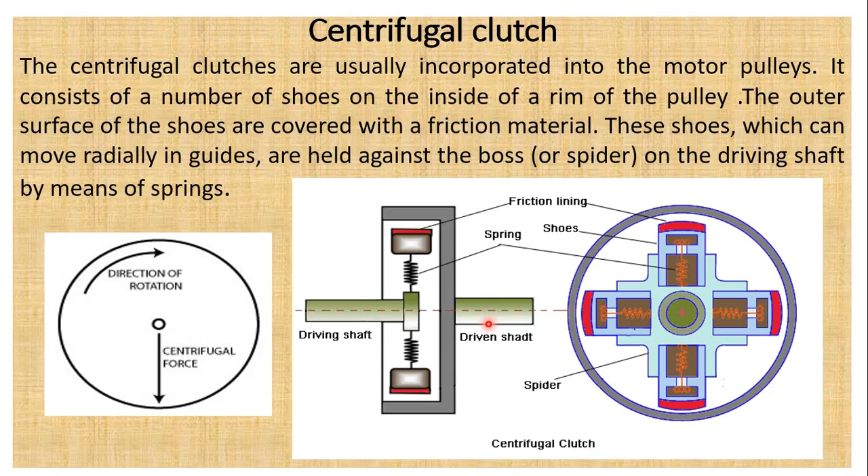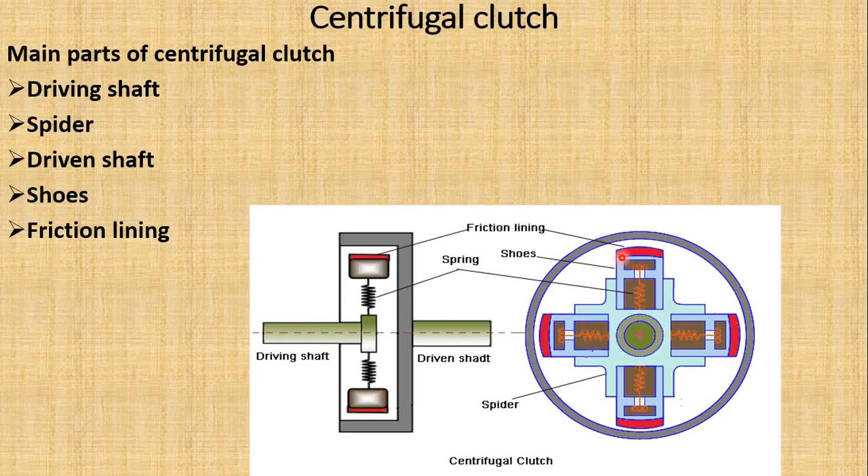Now you can see here there is a driving shaft and a driven shaft. Some important parts of the centrifugal clutch: this is called the driven shaft, and this is the driving shaft. This is a spider, or you can say spider or bush. This is the driven shaft, and these are the shoes. You can see the shoes and the friction lining, which is red in color. There is friction lining here numbered 1, 2, 3 and 4.

Its working totally depends upon the centrifugal force created by the driving members of the engine or motor. As I already told you, the centrifugal force is used to engage the clutch with the driven shaft. As the engine starts rotating, it produces a centrifugal force which makes the sliding shoes move outward.

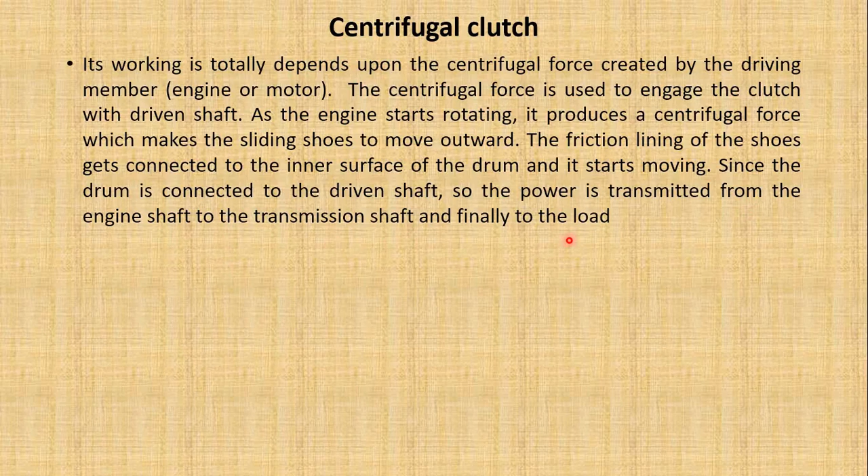The friction lining of the shoes gets connected to the inner surface of the drum, and it starts moving. Since the drum is connected to the driven shaft, the power is transmitted from the engine shaft to the transmission shaft, and finally the load is also transmitted from the engine to the other transmission shaft. We can easily understand this with the help of this diagram.

But what happens when the speed increases due to the centrifugal force? The shoe will connect with the pulley, and the whole assembly starts rotating together. As the engine starts rotating, the assembly of the centrifugal clutch also starts rotating, but the drum remains stationary and no power is transmitted at lower speed, because the centrifugal force produced is not sufficient to overcome the spring force, so the clutch remains in the disengaged condition.

Then what happens when the speed is increased? The centrifugal force also increases, and it becomes greater than the spring force, which is very important. When the speed increases and the centrifugal force is greater than the spring force, this allows the sliding shoes to move outward against the spring and get engaged. In this condition, since the centrifugal force is greater than the spring force, it allows the shoes to make contact with the pulley.

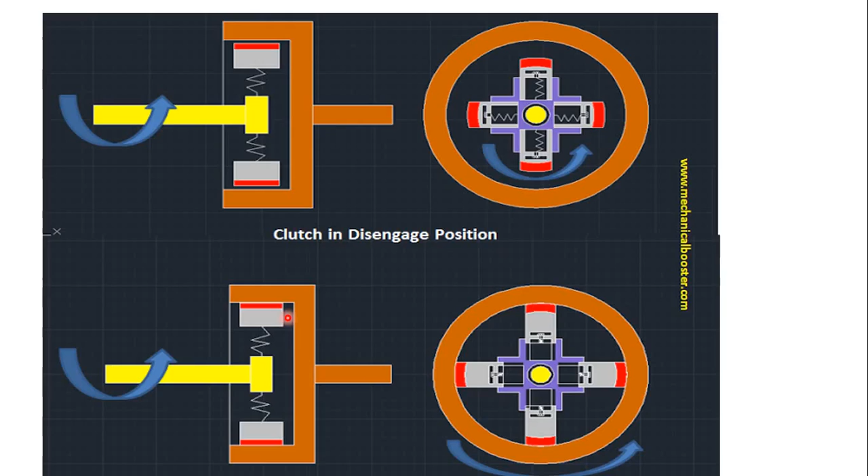This is when the centrifugal force exceeds the spring force, the shoe moves outward and comes in contact with the driven member. This pulley is connected with the driven member. When it gets attached to the driven member and presses against it, a high amount of friction is generated at this contact point.

The force with which the shoe presses against the driven member is the difference of centrifugal force and spring force. Whatever amount of force causes the shoe to get compressed against the pulley, that will be the difference between the centrifugal force and spring force.

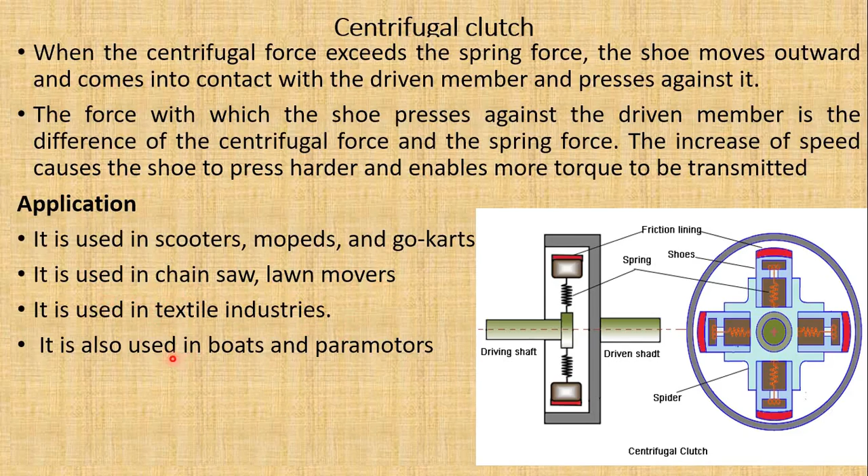The increase of speed causes the shoe to press harder and enables more torque to be transmitted. This type of centrifugal clutch is also called the automatic clutch. Some major areas of application include scooters, mopeds and go-karts. It is also used in chainsaws and lawn mowers. Mostly the centrifugal clutch is used in textile industries, and also in boats and paramotors.

Now some advantages and disadvantages of the centrifugal clutch. First, the advantages. It is easier for the driver since the operation becomes simpler. It is low in price compared to other types of clutches like cone clutches, multi-plate clutches and single plate clutches. It requires very little maintenance because it has fewer parts. The engaging speed can be precisely controlled by selecting springs.

Now some disadvantages. First, power transmission is limited due to slip. There is a high chance of slip occurring between the shoe and pulleys. It cannot be used to transmit a high amount of torque.

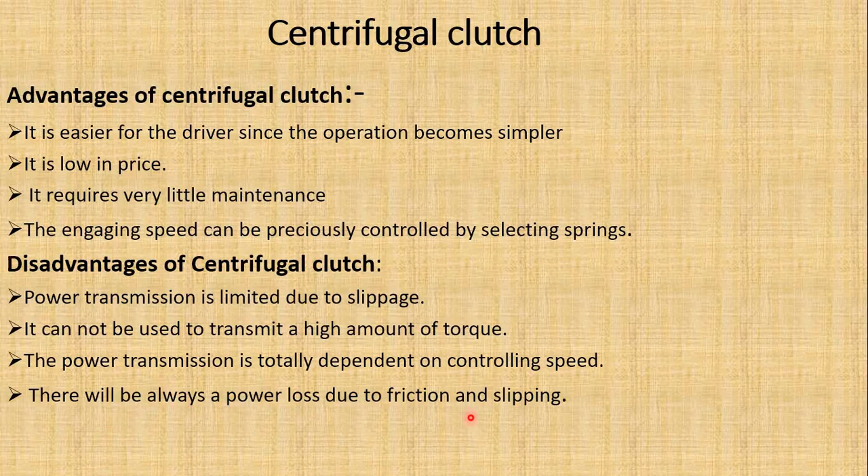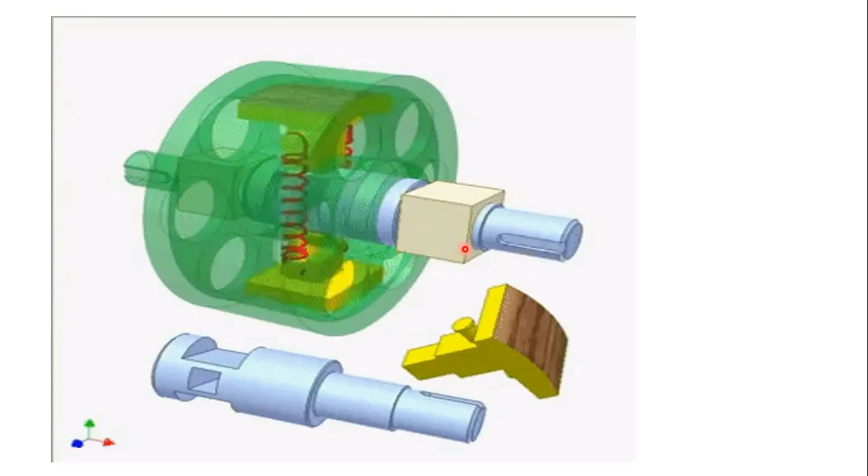At lower speed, you can see here only the shoes are moving with the spider, but at high speed they make contact with the inner surface of the pulley and they start rotating together. This is the normal working of the centrifugal clutch.

Now I will discuss the diaphragm clutch. This is the diaphragm, it will look like this. The construction of this type of clutch is similar to that of a single plate clutch, except that diaphragm springs, called Belleville springs, are used instead of the ordinary coil spring, also called a helical spring.

This type of clutch is more advantageous because it requires no release levers, and the spring itself acts as a series of levers. The pressure of the spring is always varying. It increases till the spring reaches its flat position and decreases after passing that position.

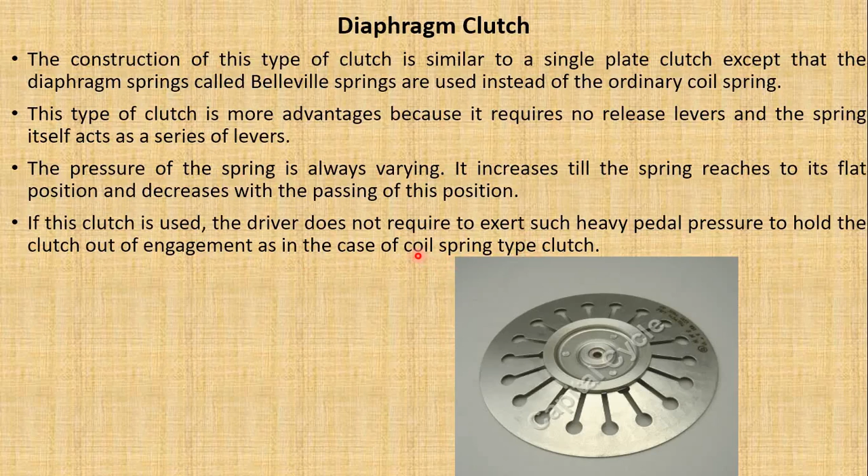If this clutch is used, the driver does not require to exert such heavy pedal pressure to hold the clutch out of engagement, as in the case of the coil spring type clutch, or single plate clutch, in which helical springs or coil springs are used.

This is a simple diagram of diaphragm spring, in which we can see here this is a diaphragm, this is a casing, this is a pressure plate, this is a clutch plate, and this is flywheel. It consists of a diaphragm spring, supported on a fulcrum, retaining rings, that is pivot ring, so that any section of the spring can be regarded as a simple lever.

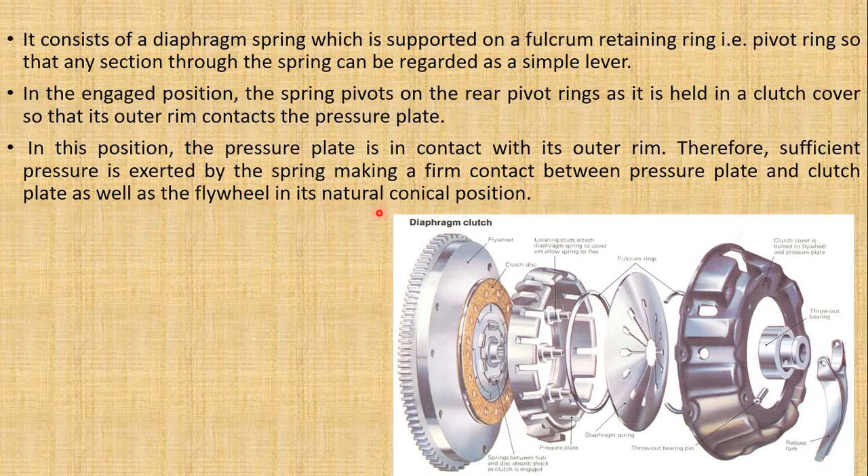In the engaged position, the spring pivots on the rear pivot rings as it is held in the clutch cover, so that its outer rim contacts the pressure plate. In this position, sufficient pressure is exerted by the spring, making a firm contact between the pressure plate and the clutch plate, as well as the flywheel, in its natural conical shape.

This is a simple diagram of diaphragm spring. In the single plate clutch, there is a helical spring at this position, but in this spring there is a diaphragm spring. You can see here, blue in color, which is conical in shape, that is the diaphragm spring.

Now this is flywheel, this is pressure plate, yellow in color, and this is clutch plate, or we can say clutch disc. This is the driven shaft attached to the gearbox or wheel.

Now what happens in this condition? In the engaged condition, the diaphragm spring takes a flat position and exerts a load upon the pressure plate. The pressure plate exerts pressure on the clutch plate, and to keep contact with the flywheel, the clutch shaft also rotates and power is transmitted.

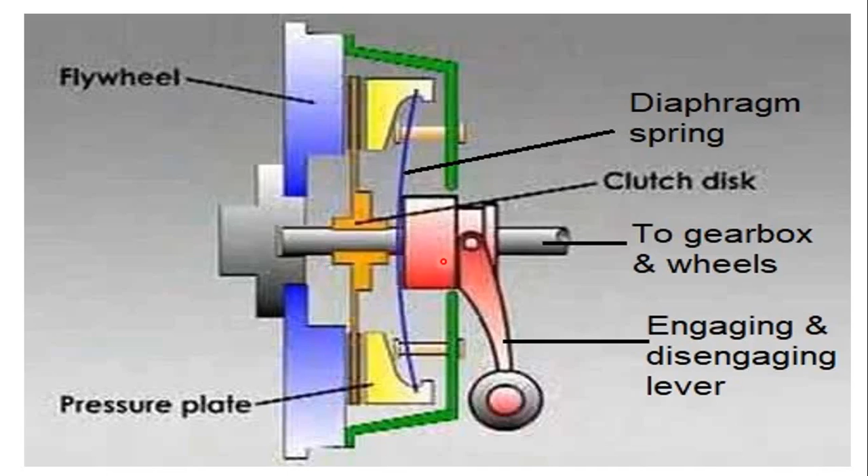But what happens when it gets disengaged? When the driver presses the clutch pedal, the diaphragm spring takes on its original conical shape, and there is no pressure exerted by the pressure plate on the clutch plate. From this, the clutch plate moves axially outwards and stops rotating. In this case, power is not transmitted from the engine shaft to the driven shaft, or any other transmission system.

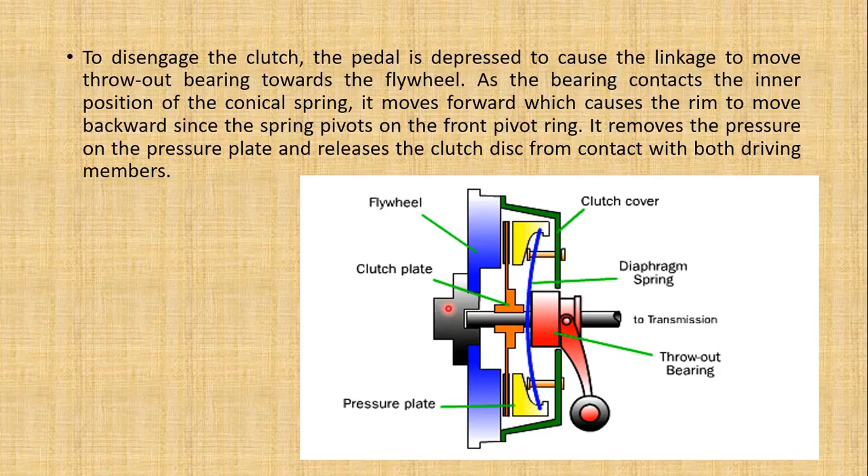To disengage, the clutch pedal is depressed, which causes the linkage to move the throwout bearing towards the flywheel. As the bearing contacts the inner position of the conical spring, it moves forward, which causes the rim to move backward, since the spring pivots on the front pivot rings, as told in the previous slide. This removes the pressure on the pressure plate and releases the clutch disc from contact with both driving members, that is the driving shaft and driven shaft.

Some of the advantages of the diaphragm clutch: first, it requires lower operating effort due to reduced friction in the clutch mechanism. Second, there is a constant and uniform load on the driven plate throughout the life of the clutch. Third, at high speed the clamping load on the diaphragm spring is not affected, as in the case of a coil spring, which starts bowing or distorting transversely.

In case of single plate clutch, a helical spring is used, and when high torque is to be transmitted, the spring gets bowing or distorting transversely. But in the diaphragm spring, this does not happen.

The fourth advantage is that dangerous vibration in the vehicle is altogether eliminated, because it provides accurate balance at all times. This does not happen in the single plate clutch or multi plate clutch. In this diaphragm spring, vibration is also eliminated because it provides accurate balance at all times. It always remains balanced.

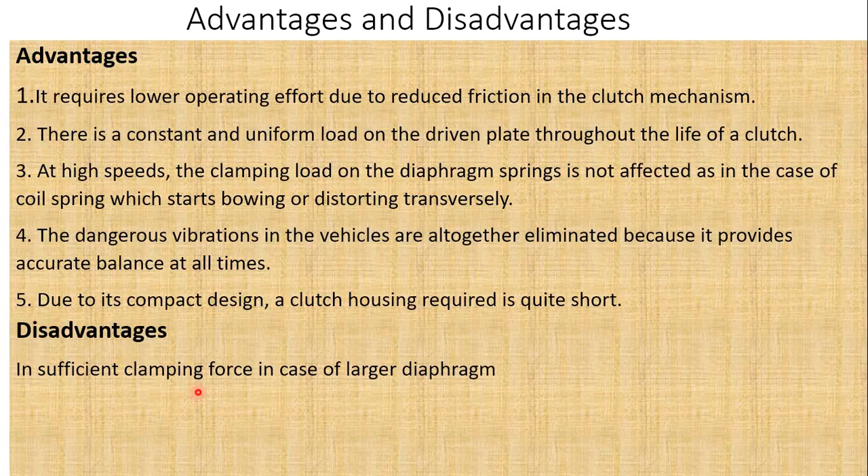Due to compact size, the clutch housing required is quite short compared to other types of clutches. One disadvantage is insufficient clamping force in case of a larger diaphragm. When we use a larger diaphragm, the clamping force is insufficient. This is the great disadvantage of this clutch.